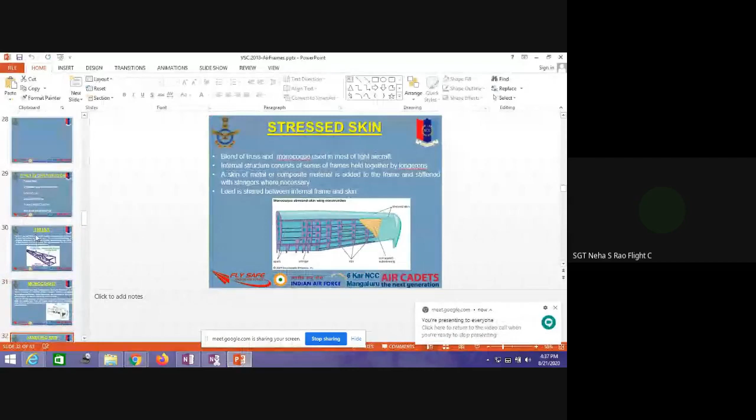Okay. I'm going to present my screen. So hope the screen is visible to you all. If you don't see the screen, please let me know. You all can see the screen? Yes, sir. Okay, fine. Yes, sir. Today we will talk about the... ask the cadets to come on time. Why Manish, you are late today? You are supposed to be my favorite cadet. A very sincere cadet.

Okay. So today we will talk about the airframe. So construction of the aircraft, the structure of the aircraft. So first of all, we will talk about the fuselage, the various techniques that are used in its construction. So what is a fuselage? The fuselage holds the entire aircraft. It is the main part of the aircraft, where all other things are connected.

So if you look into the definition of the airframe, the airframe of a fixed wing aircraft is generally considered to consist of 5 principal units. That is, basically what does an aircraft consist of? A fuselage, wings, stabilizers, flight control surfaces, and landing gears. So these are the main things which come under the airframe: fuselage, wings, stabilizers, flight control surfaces, and landing gears.

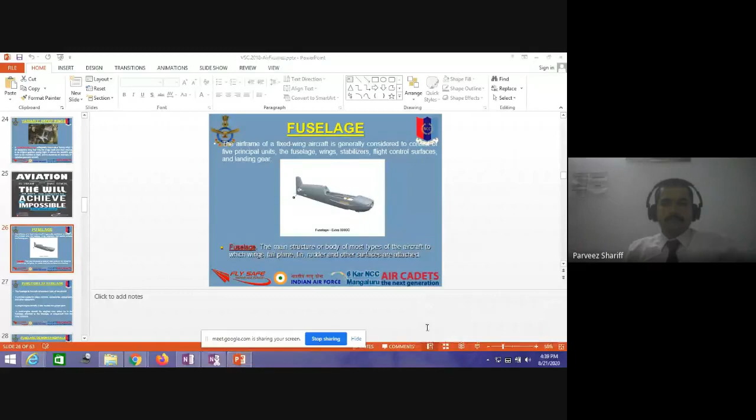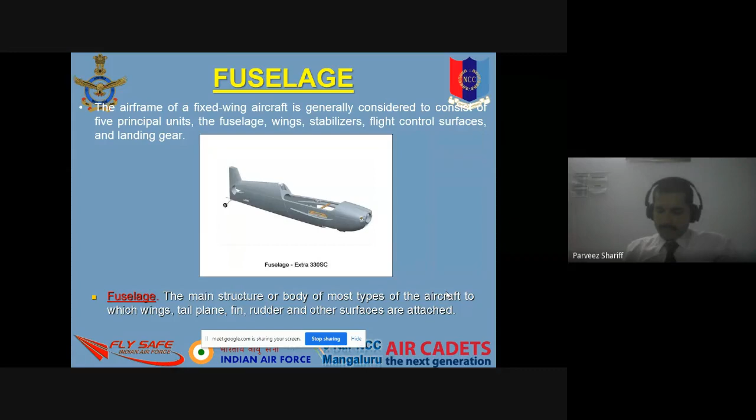So fuselage is the main structure of the body, as I told you. The main structure of the body of the aircraft, to which everything is connected, that is wings, rudders, and surfaces are attached to this aircraft. Okay. So this fuselage needs to have strength, it needs to withstand the pressure, and it should be able to carry the load. So it should serve all these parameters.

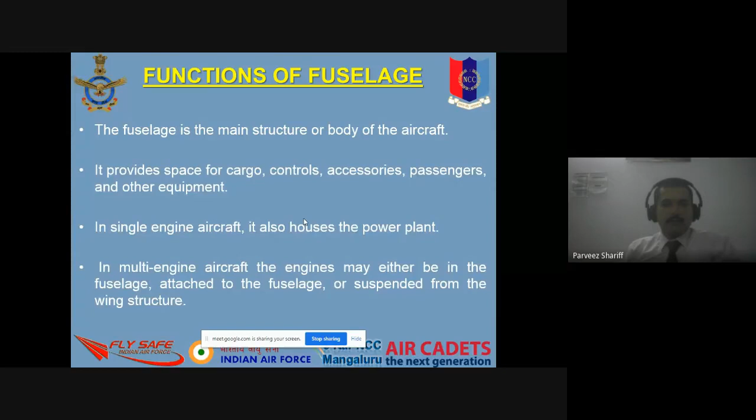So if you see here, the fuselage is the main structure of the body of the aircraft. It provides space for cargo, controls, passengers. In a single engine aircraft, it houses the power plant. In a multi-engine aircraft, the engines may either be in the fuselage, attached to the fuselage, or suspended from the wings. Okay. And when we talk about the surfaces, they should be smooth.

So the aerodynamic performance can be improved, and it should have sufficient strength to withstand the aerodynamic loads, then sufficient stiffness to retain the correct shape, because when it flies at higher altitude, due to low pressure, the structure should not compress. It should withstand that pressure.

Then mounting points: a fuselage should have mounting points for engine, armaments, fuel tank, and equipment, and it should provide protection for the crew members, and sufficient breakdown points so that it can be easily dismantled, easy for servicing and inspection. It should not be a very stringent, long structure so that it is difficult to carry for assembling or dismantling.

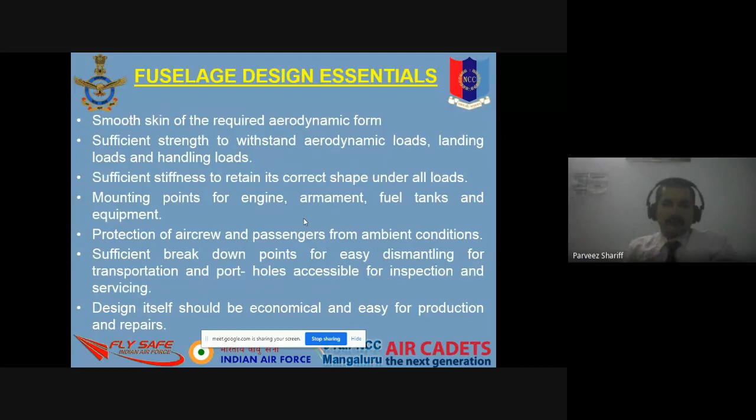At the same time, it should be economical as well, and strength and economical both should satisfy. Anyway, if both are contradictory, both cannot happen, but still a trade-off has to be made between these two parameters. If you look into the type of construction, there are various types.

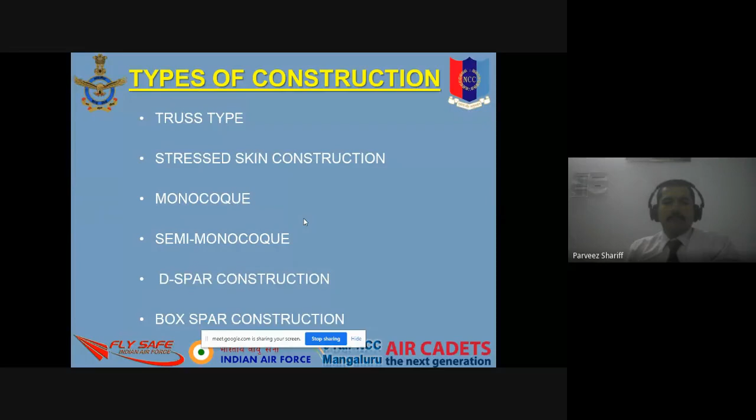One is the truss type construction, stressed skin construction, monocoque construction, semi-monocoque, D-spar construction, box spar construction.

So now first we will look into the truss type construction. The truss type construction is nothing but frames which are interconnected with longerons. Longeron means it is rods or the frame which runs from the starting point to the end point. So those kind of structures, those rods, act as the longerons.

To support those longerons, there should be diagonal tubular steel pipes or structure provided. If you look into bridges, when you pass through them, you need certain structures made in triangular form so that it can withstand the load. In the same way, this truss is constructed.

This is a rigid framework made up of members such as beam, strut, and bar to resist deformation by applied load. A truss-framed fuselage is generally covered with fabric. For this structure, when covered, we call it a skin, and that is covered with fabric, and is usually constructed of steel tubing welded together in such a manner that all members of the truss can carry both tension and compression load.

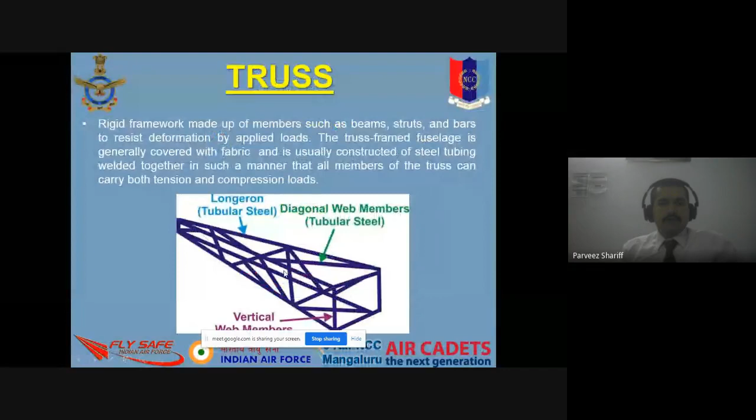So after the truss, next is the monocoque. In the monocoque, there is an absence of longeron. There are no long running steel bars. It is only the former that is there and bulkhead.

In between there is no support, so any load that is put on the skin or the metal sheets, it should withstand. Keeping that in mind, if we increase the thickness of the sheet, then the aircraft weight will increase. And if the weight increases, then again for getting lift, you need to have more thrust and a lot of other parameters come in. So it becomes very complicated.

So monocoque structures were used before, but now monocoque structures are very rarely used. In fact, semi-monocoque structures are used nowadays. As per the statement, the monocoque is a single cell fuselage that relies largely on the strength of the skin or covering to carry the primary stresses.

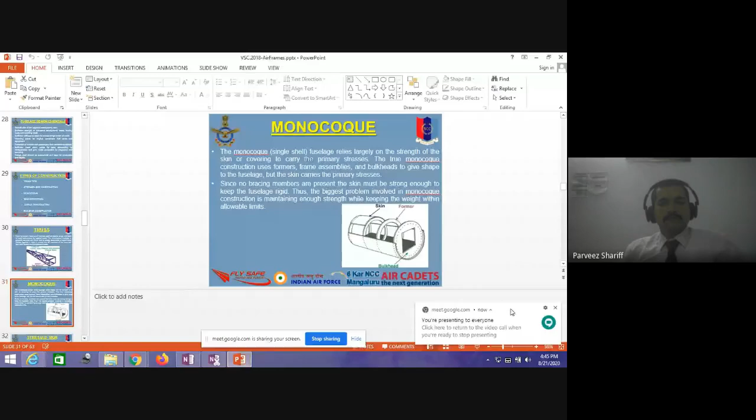The true monocoque construction uses the formers - these circular rings we call the formers - frame assemblies and bulkhead. This front side, what you see, we call it the bulkhead. This we call the bulkhead, the front and the back side, to give the shape of the fuselage.

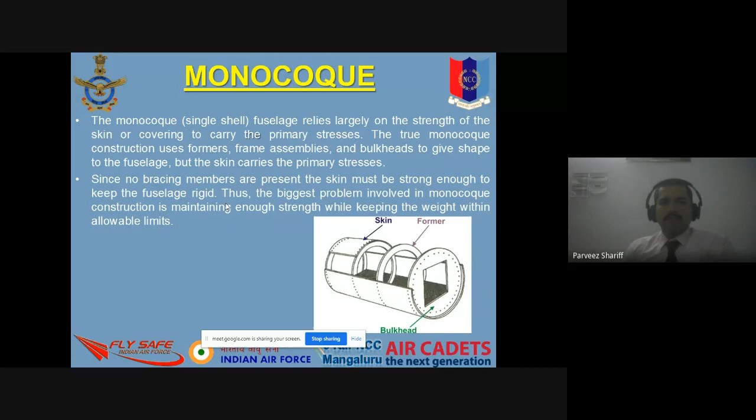But the skin carries the primary stress, meaning the entire load is on the skin. Since no bracing members are present, the skin must be strong enough to keep the fuselage rigid. So the problem is, as I told you, it increases the weight.

Next comes the stressed skin structure, where it's a combination of the monocoque structure and the truss, meaning it has the longerons, it has the ribs. So these are ribs - these structures which you are seeing here - and the lines which are running, these are called longerons, and these are spars.

The main one running from left to right here, and these rods in between, we call them stringers. Above that there is a stressed skin. So now the load is shared between the internal frame and the skin. The internal structure consists of a series of frames held together by longerons, which are stringers.

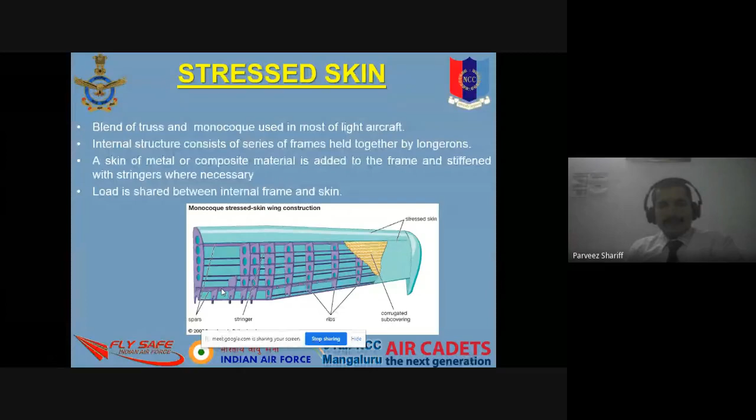So what do we have in the stressed skin? We have the spar, stringers, ribs, and stressed skin. Now for the semi-monocoque structure, we have the longerons - it is a combination of both monocoque structure and truss. If you see here, the long rods running in purple color are the longerons, and there is a bulkhead, a former, and the skin.

You can see from this structure, now it is not only the circular rings, but these circular rings are supported by longerons. So now the load has been distributed uniformly. This is called a semi-monocoque structure.

To overcome the strength/weight problem of monocoque construction, a modification called semi-monocoque construction was developed. In addition to formers, frame assembly and bulkhead, the semi-monocoque construction has the skin reinforced by longitudinal members. Most modern aircrafts are semi-monocoque types.

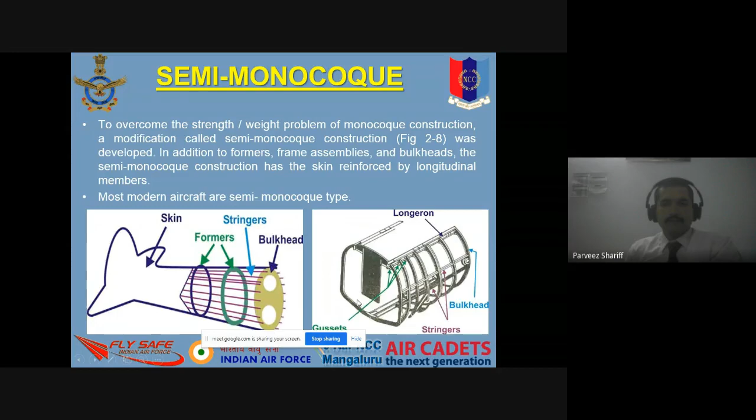So these are stringers - these in between are stringers. And next is the D-spar.

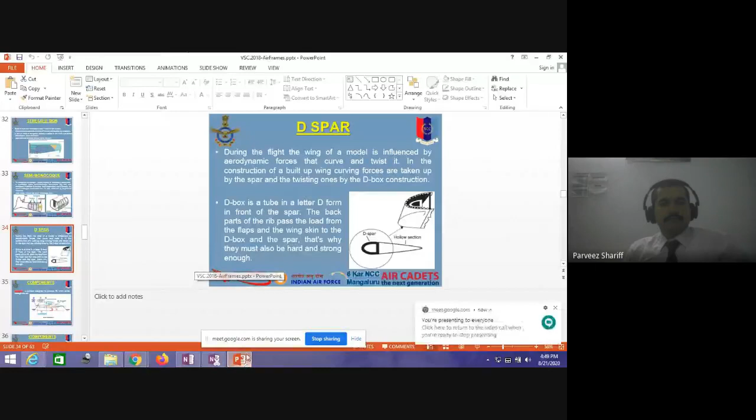So next is the D-spar, because the front side of it is a kind of a D, it looks like a D, so it's called a D-spar structure. So during flight, it is mainly used in the wing.

The model is influenced by aerodynamic force that curves and twists it. In the construction of the wing, curving forces are taken up by the spar and twisting ones by the D-box construction. The D-box is a tube in a letter D form in front of the spar.

So that's why they must be hard and strong, because most of the aerodynamic weight is influenced on the leading edge of the wing. That is why these parts need to be thick and need to have a strong construction.

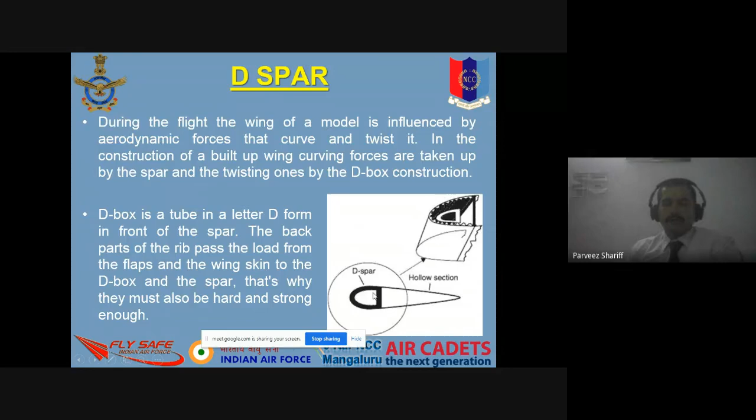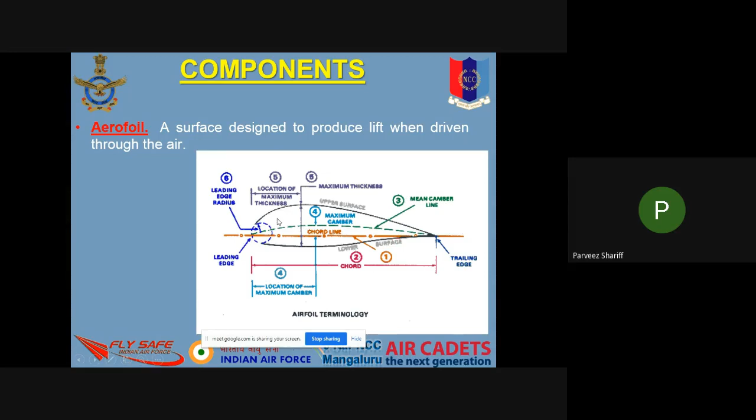Now if you look into the aerofoil shape, this is the leading edge here and this is the trailing edge, and this orange line is the chord line, a virtual line which joins the leading edge to the trailing edge. This green dotted line is the camber line, and most of the maximum camber is at the front side, at the leading edge, at the half of this. So the location of maximum thickness is available at this point of the wing, and this is where the D-spar comes in.

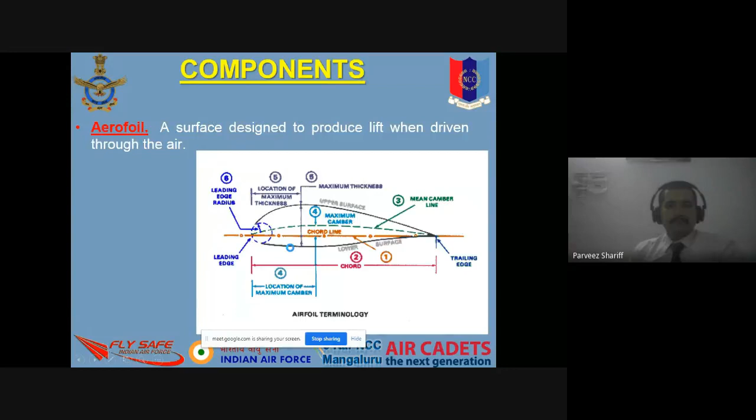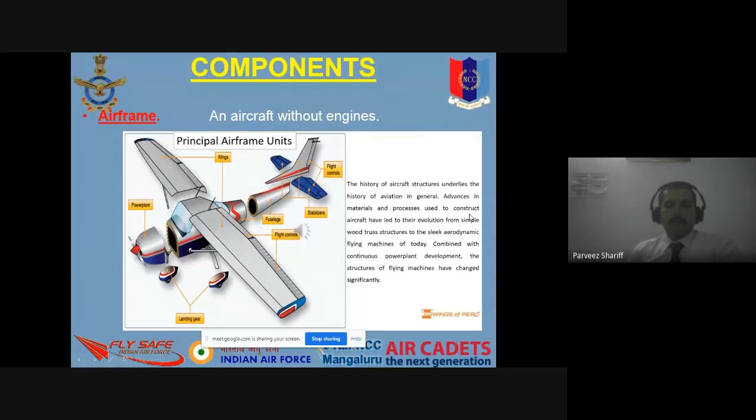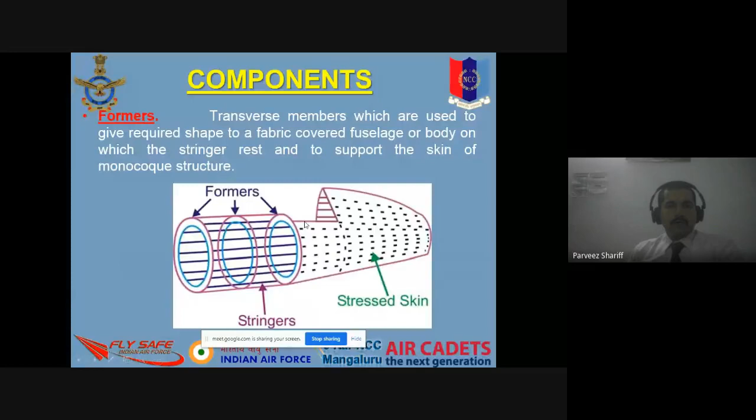The other components discussed here are the formers, as seen before in the slide. These rings in between, which are connected with the longerons or stringers, these are called formers. Above that is the stressed skin, the frames - the transverse structural member of the fuselage supporting the longerons.

So frames, again, are the transverse structural member of the fuselage supporting the longerons. What is the definition? We can write it as the transverse structural members of a fuselage supporting the longerons. And what are longerons? The principal longitudinal member of the fuselage which runs from front to rear - that should be the definition.

What is a longeron? It's the principal member of the fuselage which runs from front to rear and is usually supported at various points along its length by other structural members. And a stringer is a stiffener which also assists the skin to carry direct load in the direction of its length. So the main beam which runs here is the longeron, and the small rod which runs is the stringer.

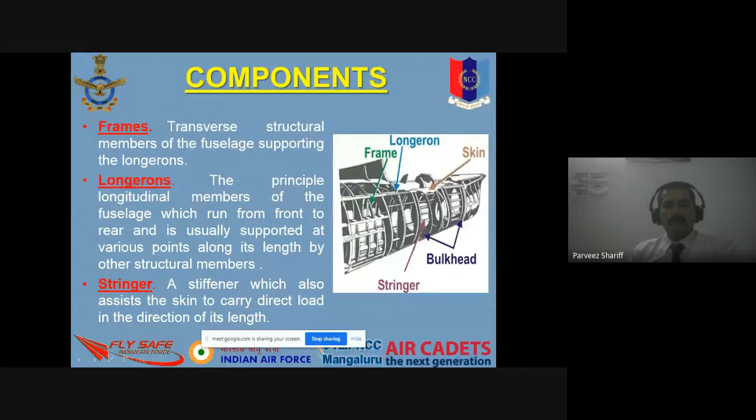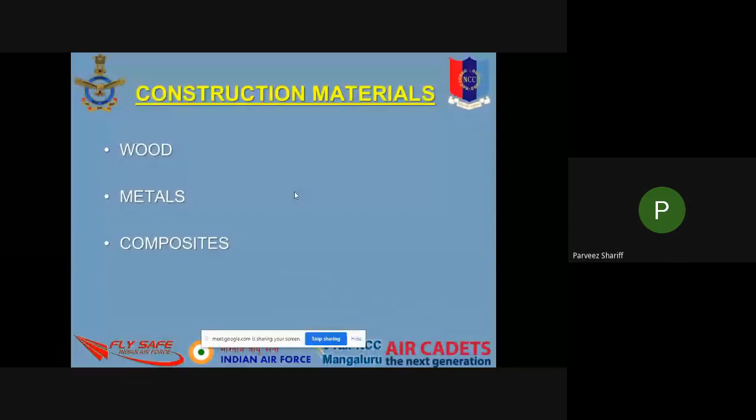These are raised up to encounter the problem of vortex. I will come to that at the end of today's session. What are vortices? When an aircraft flies - I think I discussed it with some batch, just remind me if I discussed it or not.

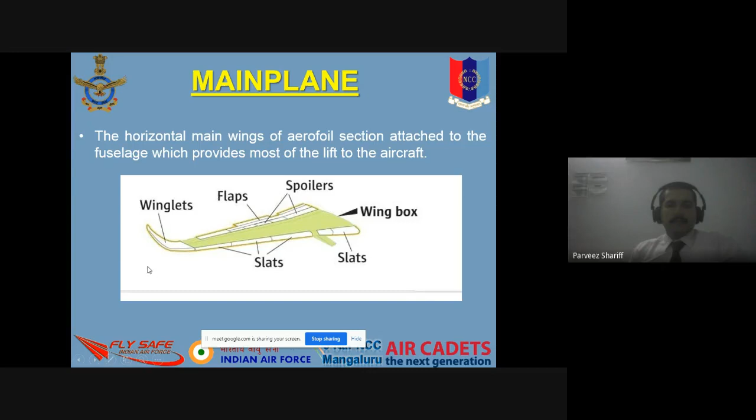These vortices are basically a clockwise and anti-clockwise wing rotation. The air is created here in an anti-clockwise direction, which is again a problem that will cause the aircraft to lose control. So to counteract this vortex problem, the wing tips are not kept straight, they are raised up high - that is the winglet, that's what we call it.

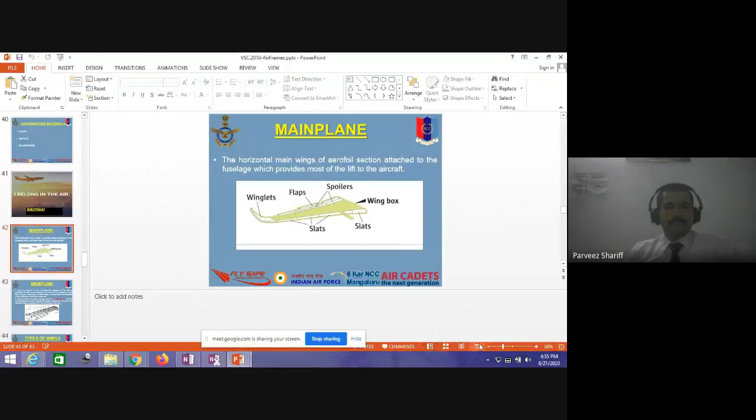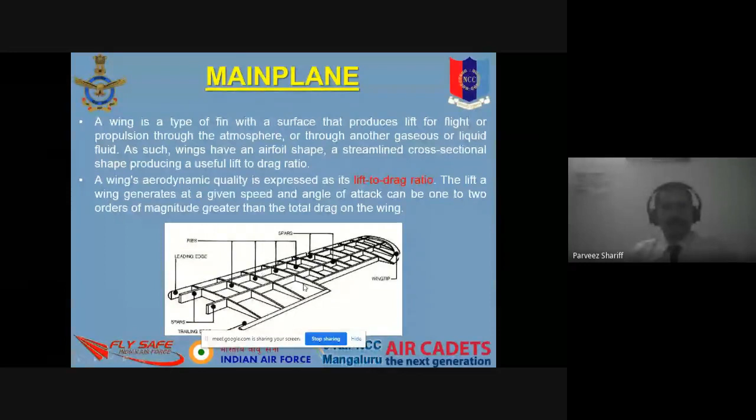Basically it needs to compromise with the lift to drag ratio. Now if you look at the wing structure, previously we saw the fuselage, now we are looking at the wing. It has the spar, this main structure running from the fuselage to the wing tip. There is the leading edge, the trailing edge, and these are called ribs. This is the basic wing structure.

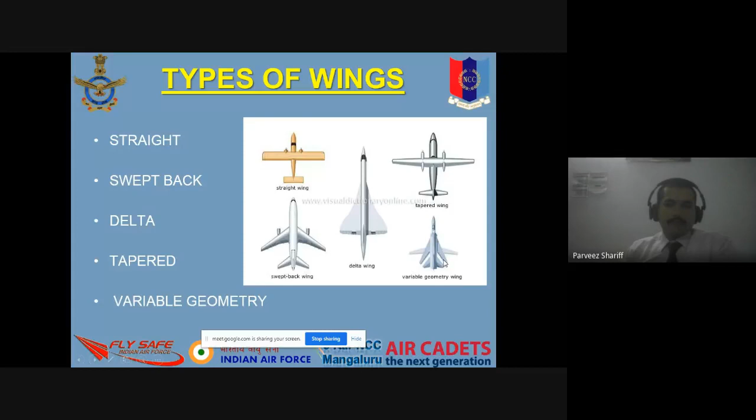Tapered wing is this - it means there is a slope in the leading edge as well as the trailing edge, that's why it's called a tapered wing. Then variable geometry wing means the wings are initially in the front at takeoff, and when flying at Mach 1 and above speed, the wing comes back. These are called variable geometric wings.

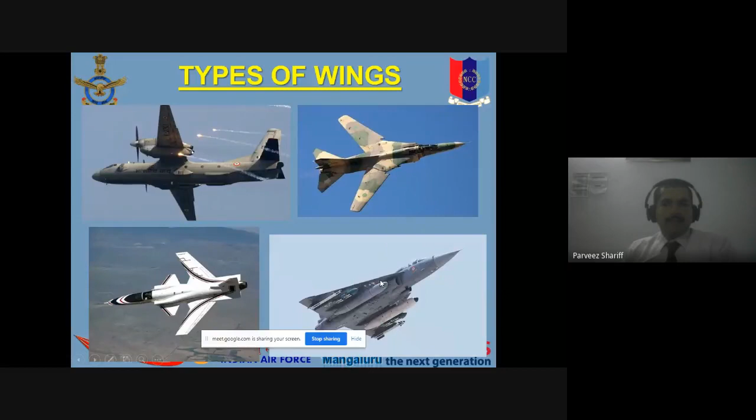Now you can see all of this here, the different types. This one is a geometrical variable wing. This is a delta wing on the Tejas aircraft. And this might be a tapered wing.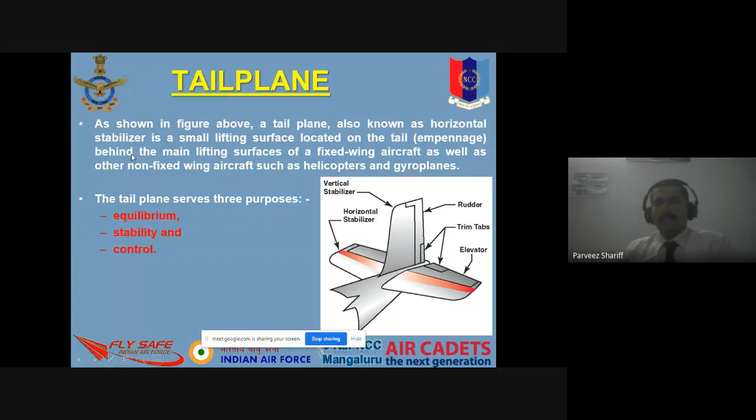Now let us look into the tail plane. There are different types of tail plane. The tail plane serves three purposes: equilibrium, stability and control. It basically has a horizontal stabilizer and vertical stabilizer. The purpose of this tail plane is to provide lift to the aircraft.

Now from this diagram you can see the types of tail plane. Conventional tail plane is this, shaped like a plus sign. T-tail is which you see in most transport aircraft. Cruciform is where the horizontal stabilizer is not at the tip of the vertical stabilizer, but at the center of the vertical stabilizer - this is the cruciform structure.

And H tail is where there is not only one vertical stabilizer, but two vertical stabilizers at the corners of the horizontal stabilizer. Here we have three vertical stabilizers, so this is called triple tail. The V tail doesn't have any horizontal stabilizer - this V shape serves as rudder as well as horizontal stabilizer, providing yawing action as well as pitching action, both served. And inverted V is this.

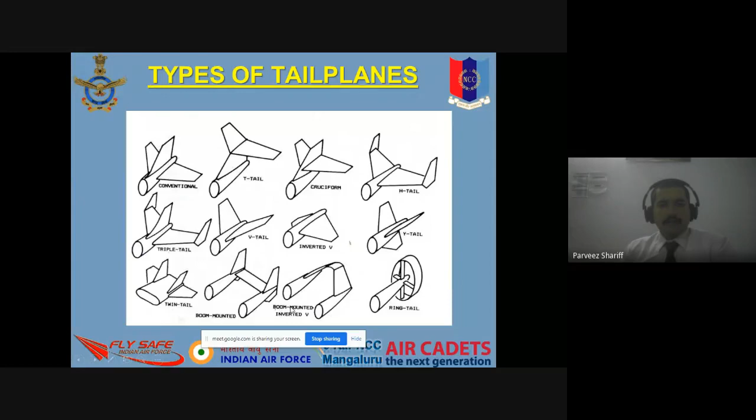And Y tail plane, and this is twin tail - you can see twin tail in the Sukhoi aircraft, where we have two vertical fins. Boom mounted, you see in old aircraft this kind of structure, and boom mounted inverted V, and the ring tail.

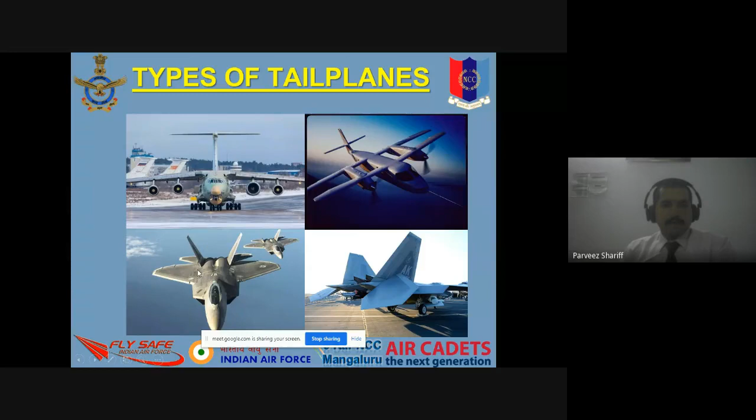So now you can see from all these - this is a T tail, and this is the cruciform tail. You see this horizontal stabilizer is not at the bottom, it is in the center of this vertical fin. This is a cruciform, and this is the V tail. You see this drone which has an inverted V tail. And you see this aircraft which has a triple tail, here we have three vertical fins. And if you see this, it's a kind of ring tail here, and this is another type as I told.

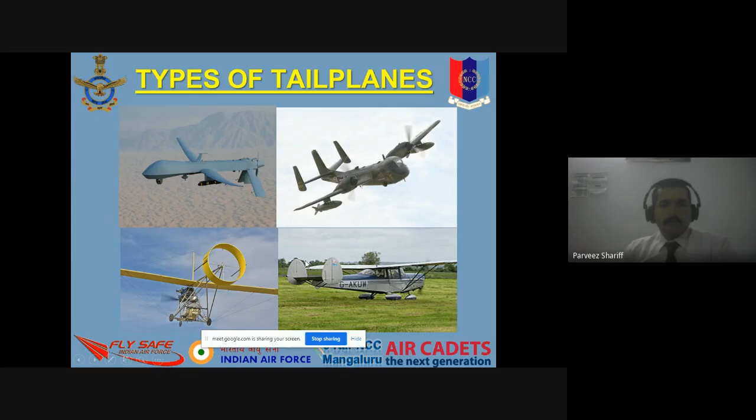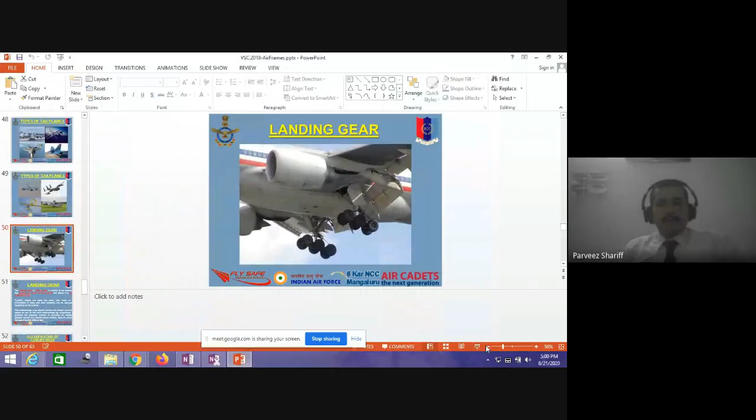Let's talk about the landing gears. Landing gear is nothing but... it's actually very funny to read your seniors' answers - what is undercarriage? Most cadets write undercarriage is the load which the aircraft carries. It is not that. Undercarriage or landing gear mean the same thing, so don't get confused.

Undercarriage means the wheels, landing gear also means the same wheels, which help the aircraft in takeoff and landing or in taxiing movement at those times. So these are called the landing gears, also called undercarriage as written here. The undercarriage or landing gear in aviation is a structure that supports the aircraft on the ground and allows it for taxi, takeoff and landing. What are the different types of these landing gears or undercarriages?

It's of skid types, wheel, ski, or a combination of these can be deployed, depending on the situation. If you are landing on water, the aircraft is supposed to land on water, then you need to have floats. Then if you are landing on ice areas or snow areas, then we need to have skis.

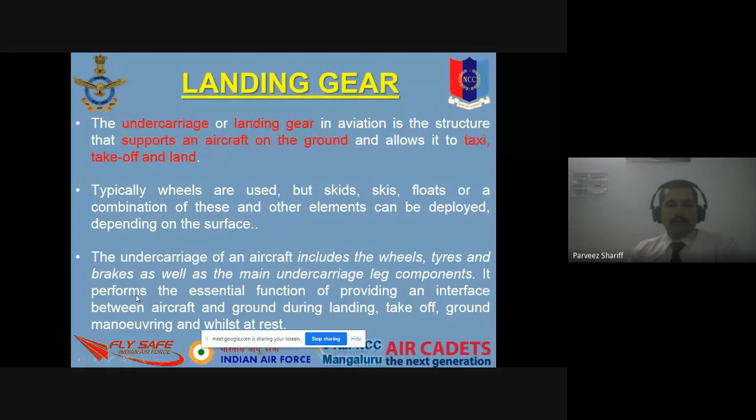Skids means the kind of structure which is there in helicopters. So the undercarriage of the aircraft includes the wheels, that is tires and brakes, as well as the main undercarriage leg mounts and leg components. It performs essential functions. So there are different types of landing gears again.

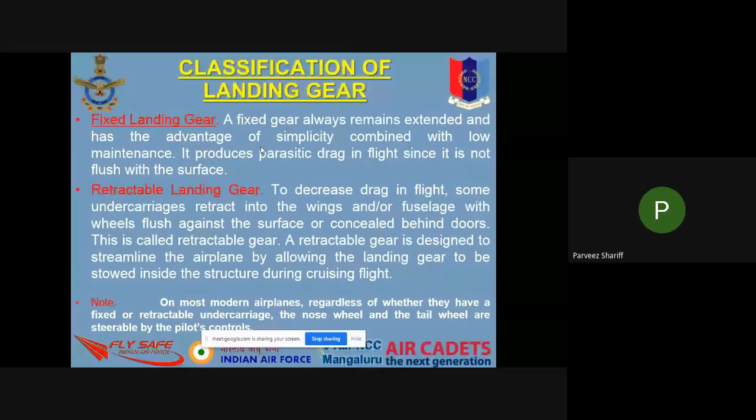Fixed landing gears. Fixed landing gears means like how we have in Virus. It doesn't go inside the fuselage or in the wing. It is fixed. When we fly at any altitude, the wheels are fixed. So those type of landing gears. In Virus it is okay. We are not flying at very high speed, so the drag is not that much.

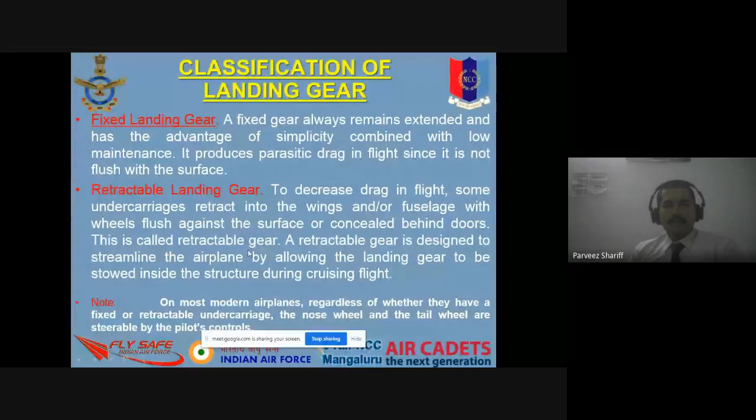Otherwise, when aircraft are flown, maybe a commercial aircraft or a fighter aircraft, these landing gears provide additional drag. So to avoid this, these undercarriages are taken inside the fuselage or under the wing, so that there is a smooth surface and the drag can be reduced. Those kind of landing gears are called retractable landing gears, which move inside and come out during landing. Most modern aircraft have retractable and small aircraft have fixed landing gears.

The problem with this conventional landing gear is when it needs to turn, this tail wheel will go out of the paved surface, the runway or taxiway or anything like that. And the visibility is also poor in this case for the pilot.

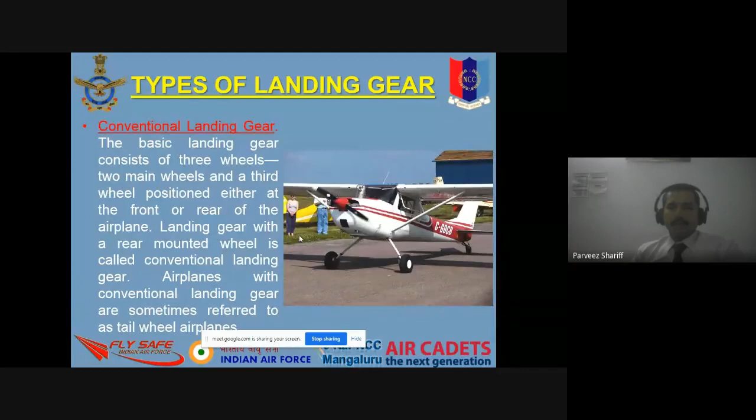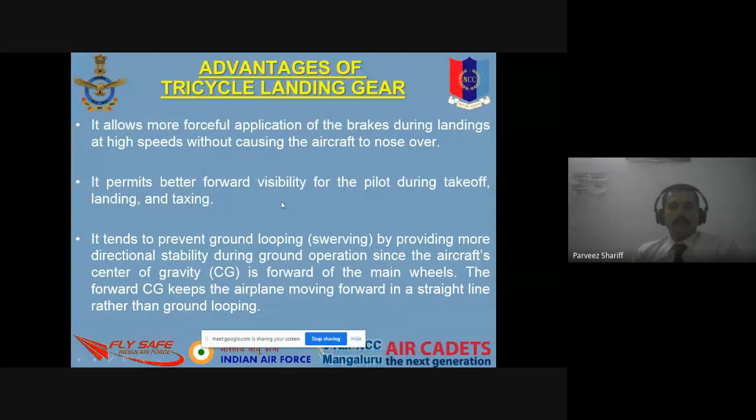So the next which came is the tricycle landing gear. If you see, it looks like a tricycle, like an auto. It has two main wheels under the main wing or under the fuselage, and rather than a tail wheel, we have the nose wheel. So that makes this a tricycle landing gear. So this is another kind of landing gear.

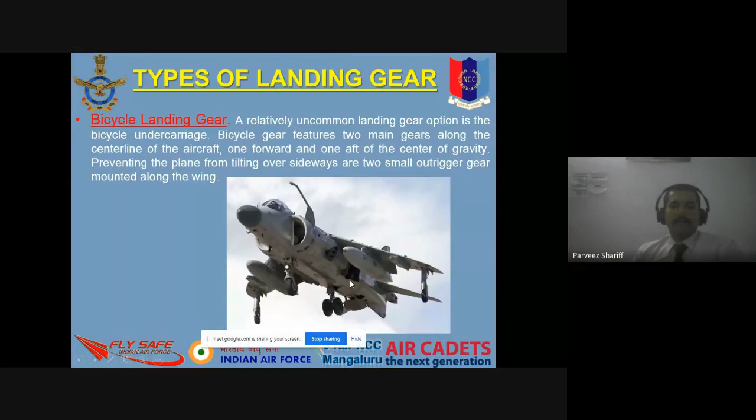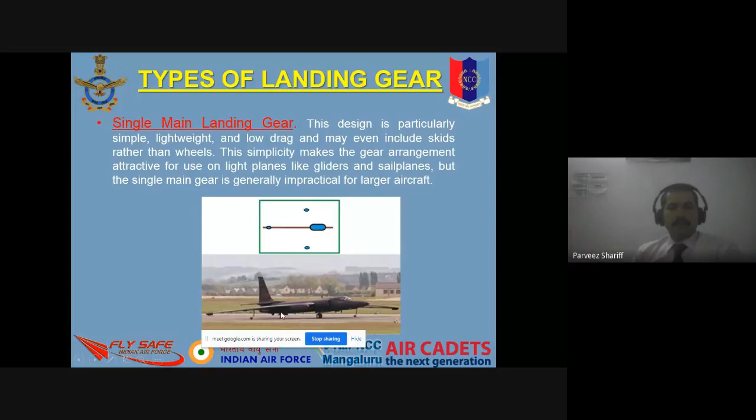This is a bicycle landing gear because it has only two main wheels under the fuselage. You can see this in aircraft like the Harrier that take off vertically, and there are two supporting wheels under the wings. So this type we call bicycle landing gear. And this is a single main landing gear, because there is only one main landing gear, with supporting landing gear at the wings and at the tail of the fuselage.

And this is a quadricycle landing gear. It means there are side by side landing gears, and again at the tail side there are two main landing gears. The type of landing gear depends on the size of the aircraft, how many landing gears it should have.

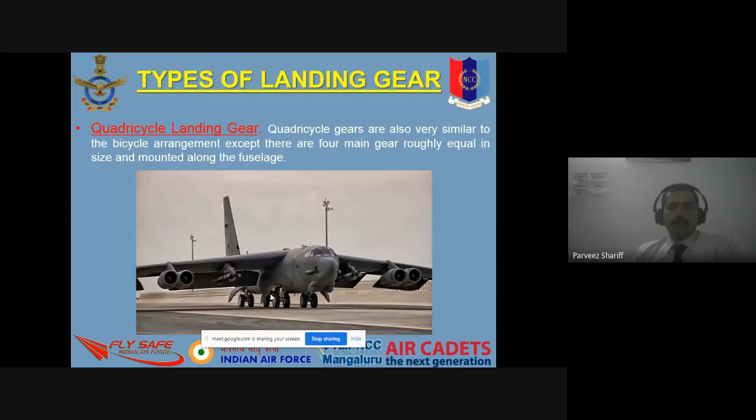And this is the multi-bogie landing gear. You will mostly see it in cargo planes and transport aircraft, because it's a very huge aircraft and needs to be supported by multiple wheels. So this is multiple wheels per landing gear strut. It is especially common to place two wheels on the nose strut of the tricycle arrangement. It is also a tricycle arrangement, but on the main wheels it has multi-bogie arrangements.

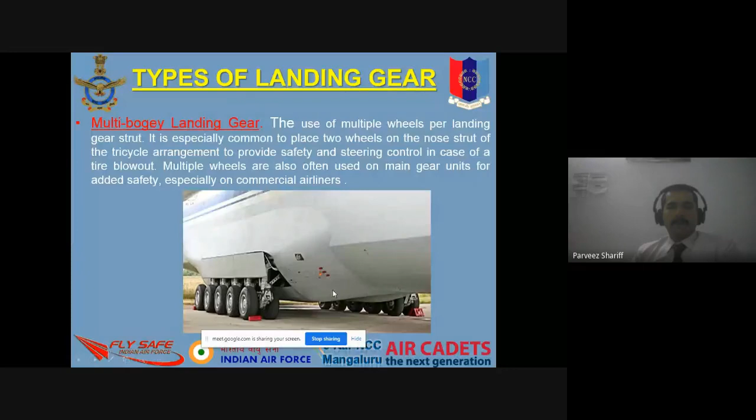So that's it for today's session. Today we talked about the airframes and the landing gears.